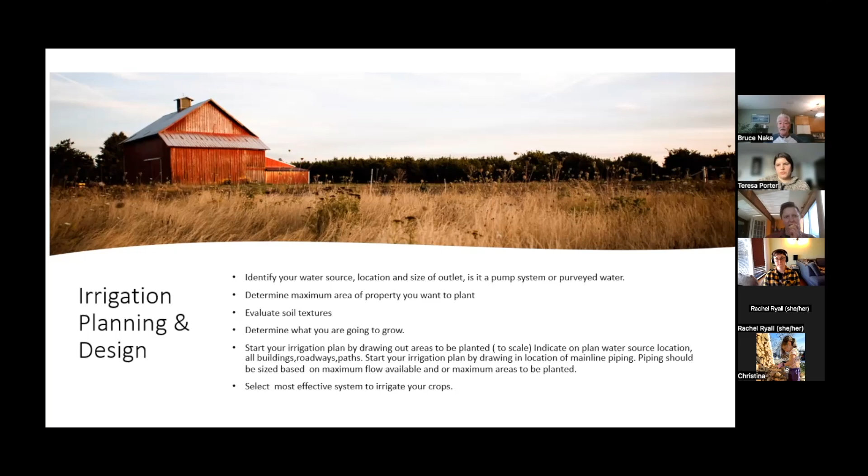Your main line is from your source of water. It is going to be the main carrier pipe, or is going to carry your water to your various areas that you have planted throughout, obviously. Okay, so we are going to look at your water capabilities, where your sources are from. So we have two sources of water capable.

We're going to be looking at water that is going to be pumped, or we're going to look at purveyed water. So if you're using a pumping system, it's important to know a little bit about the well. If you're new to a piece of property, you can usually get something called a well log. A well log is something that a well driller or a pump installer has produced. It's going to tell where your pump is, how deep it is down, and potentially what the power is available and how much water is available. That's a very handy tool to have.

Failing that, because there are some older wells out there that may not have that, you need to do some research. You need to look at what is in there for a pump. What is the total dynamic head of that pump? So what the total dynamic head is, how hard does that pump have to work to bring that pressure for your sprinklers to work? We need to know these sort of things. You can usually get a pump curve or something like that. If you know the model of the pump, take it to your local distributor or look it up online. You can usually find curves for these pumps.

So you have some sort of indication of how much water you have available, because a lot of people think, well, I got a pump, I got a well, here I go. But you have to put it all together. Because you have water, do you have enough to facilitate irrigating the entire area? Or maybe you'll have to step it down if you have a lack of water or too small a pump. So these things will have to fit together before you follow.

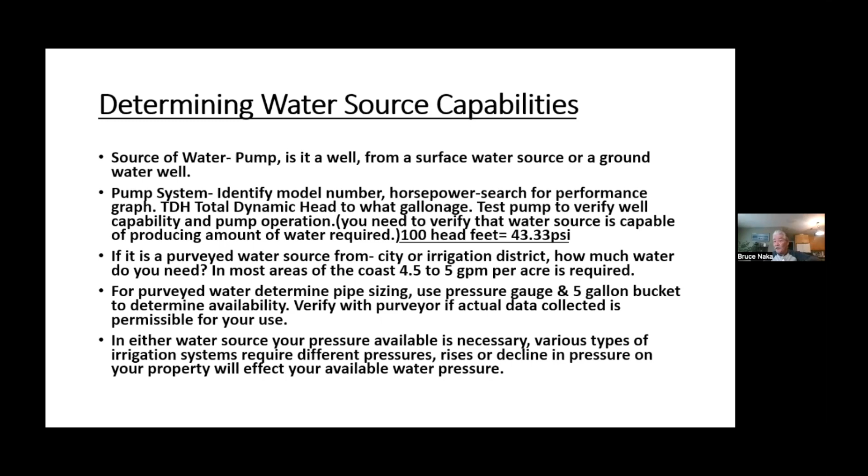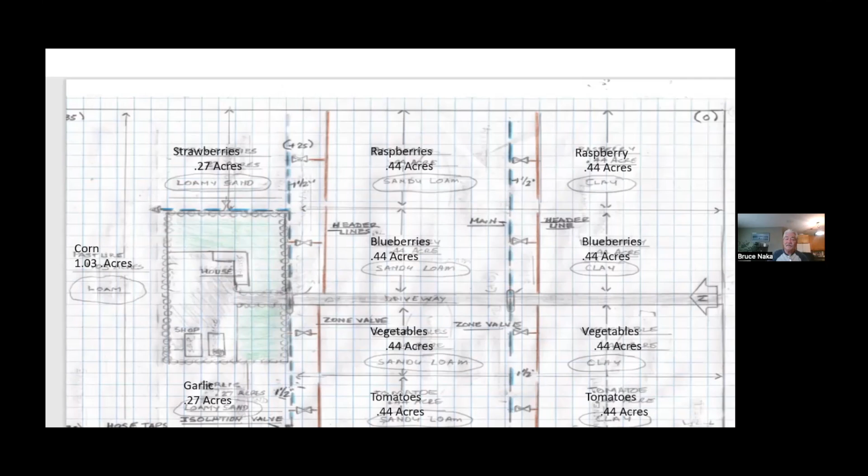Okay, soils. I won't spend a lot of time on soils. I am going to suggest something to you. As far as testing of soil textures, it can be very easy, but I think there's a simplified guide out. I was involved with another fella on a project in the Okanagan, which we just completed. Part of it was we had to develop some case studies as well as some fact sheets. My cohort on this did an exceptional job of creating some fact sheets.

He goes right through in detail how he would suggest you test your soil textures. So I emphasize that's a good way to go about it. All the way from getting the large rocks out to moistening the soil, rolling it in your hand, trying to get it into a ribbon. If it won't make into anything, it's going to be a sandy soil, and then it progresses down.

So I think that'll be available on the website. Probably you'll be able to get that from the CAI, Climate Action Initiative website, or you will be able to get it from IAF, the Investment Agriculture Foundation. So those would be 2 sites where you'll be able to get that.

On your soil triangle, you have groups: loamy sand, sandy loam, clay loam, and so on, all the way to your silts and your silt loams. If you can determine the textures of your different soils, you can determine the amount of water that your soil will hold, which is the important factor, because that's how you're going to determine how much water you have to give your plants. You want to determine if it's sandy soil, sandy loam soil, silt. There are a bunch of variables in between, but I wanted to minimize it.

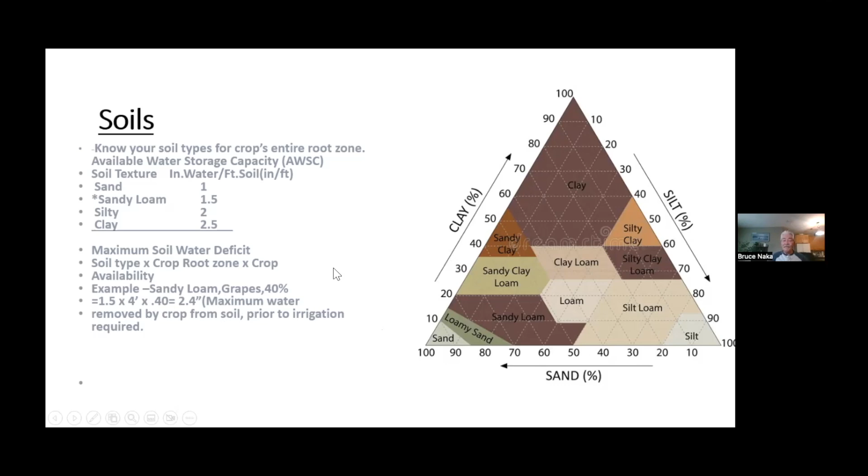I won't spend a lot of time on that right at the moment. It's just for the concept I'm going through. Okay, components of an irrigation system.

An irrigation system: what we want is an efficient irrigation system. That's one that's going to maximize available water for use on its crops, as expressed as a percentage. That's how you determine how efficient the system is.

Regardless of the type of irrigation system that you have installed, they have a lot of common items from your point of connection out to the field. There's a lot of the same items used regardless of the size of the system or the crops you're growing. There are some very common features of them. For example, where you start, you're always starting with either your pump or your connection to your water from your district or from your permitted water source.

The first item nowadays on most systems is a water meter. Water meter is the first item. It's usually followed by a backflow preventer. Anytime you have a cross connect where domestic water could also be supplied, you would need a backflow preventer. From there, you're going to be going out; somewhere along the line, a lot of people may want to introduce fertilizers to the system. And if you have drip irrigation and micro irrigation, that's the most efficient method of getting your fertilizers down into your crops.

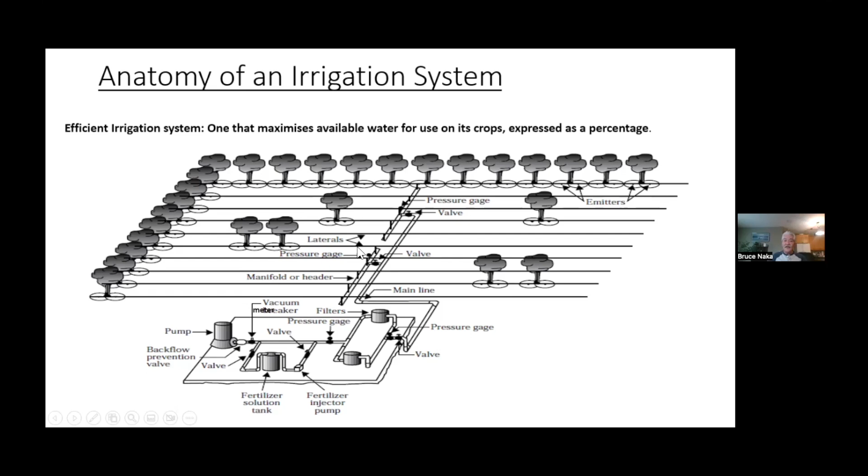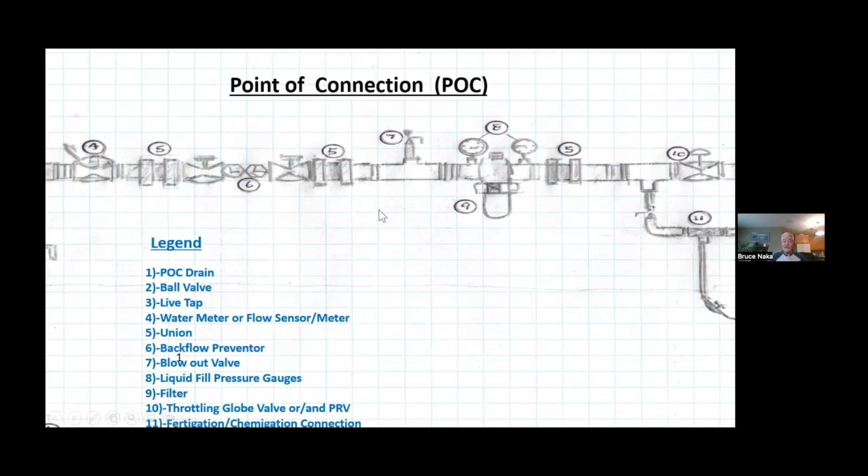Water meters. I showed where they go on the system. A lot of people see the water meter as something that irrigation districts put on as a great way to increase cash flow by charging you for your water. That maybe has some truth to it, but I think it's the only way that you're going to know how much water you're using, and if you are being efficient with your water use. A lot of irrigation districts in the Okanagan, for example, are giving agricultural customers an allocation, the amount of water you are allowed to use over the course of a season. If you exceed that, the threat is that eventually you will be charged accordingly. So the water meter can be a tool.

These little red dials on the side here, if one of them is continuously moving around, as you've probably seen on your house, with no water running in the house or out in the field, it means that you have a leak in your system. Good way to determine a leak. The flow meter can also be used: most of them nowadays are in cubic meters, but if you time how long it takes to get a cubic meter of water, it gives you your flow rate, which you could change to gallons per minute by calculating it out. So this can be a useful tool to detect leaks and to monitor how much water you're using.

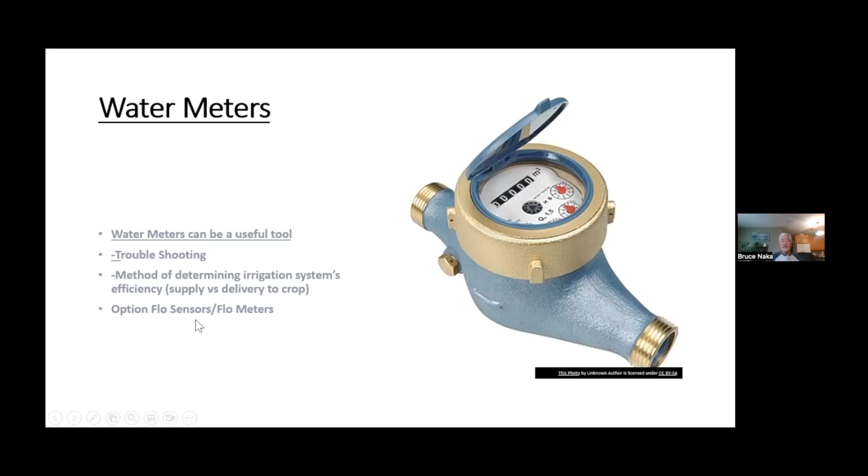Filters are really important in micro irrigation, drip irrigation, but even if you're using sprinklers, if you have very turbid water, it's a good idea to stop those contaminants out of the system versus going downstream and having them plugged. So there's a couple key things that are important. Remember, I was saying before that your point of connection would be the area that would be the minimum size. What I would suggest is you make all of the components in your main connection.

What I would advocate on a filter system is to have a filter system with enough surface area. Surface area is the area of a screen in this case here. This is a screen in this filter. So this screen surface area is the amount of filter area that you have available. So let's say you have a 1-inch outlet on your system, and you had a 1-inch filter, and that is what you use to filter your system.

What I would say to you is, depending on how coarse this screen is in your system, and that's going to be determined by what you're irrigating with. If it's with big sprinklers, not an issue. If it's with finer drip, the screen outlets would have to be a tenth of the size of the orifice that you have to minimize pluggage problems. So if you have a manual clean filter, a lot of times what I'll recommend, if you had a 1-inch service, for example, I would look at putting a larger filter, maybe a 1.5-inch filter, in that area with larger surface area, so it's not going to plug up as quick.

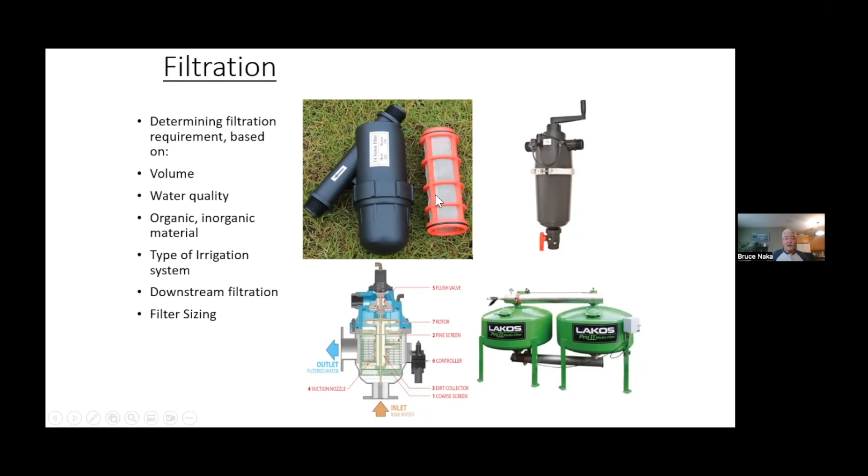Okay, on a main line, I'm not going to spend a lot of time on a main line other than to say that this has been caused by a vacuum. That's why that pipe has collapsed here. A vacuum, I was talking about air relief valves. I'm going from backwards to forwards here, but an air relief valve is one of the most crucial devices on the main line.

A short one for a small farm may not be as important, but keep in mind that if you have what's called a continuously acting air relief valve on the system, it's going to help your system operate that much more efficiently for a lot of different reasons. If you're filling the main line up with water, the air relief valve is going to evacuate all of the air out of the main line wherever it's located, so that it can more quickly fill that line up. If you're emptying a line, the air relief valve is going to allow air into the line, so it's going to help you to empty the line quicker.

Air relief valves generally are going to evacuate air out of a line if you have air in a main line, which usually will be located at high points on your main. So like on that first diagram I showed you of a field that had 35 feet in elevation change, at the very top of that field, you should have an air relief valve to evacuate that air, so it's not going to cause problems in your system.

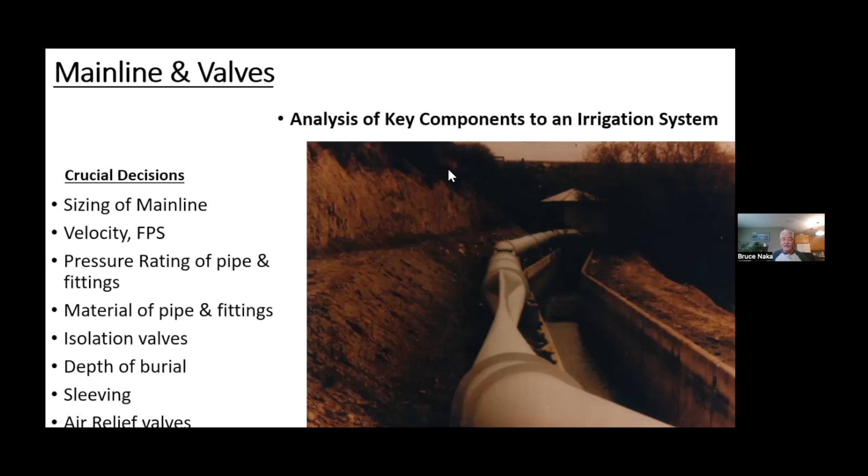Air relief valves we've already talked about. Okay, there is the air relief valves. The other thing I should mention about air relief valves on a system, as I said before, they should be at the high points of the system. If you have any control valve, like a pressure reducing valve or something like that, or a filter station, you should have an air relief valve there. And then if you have a long main line, like on a lot of our larger agricultural projects, every 1,000 feet along that main line, be it even flat ground, you should have an air relief valve.

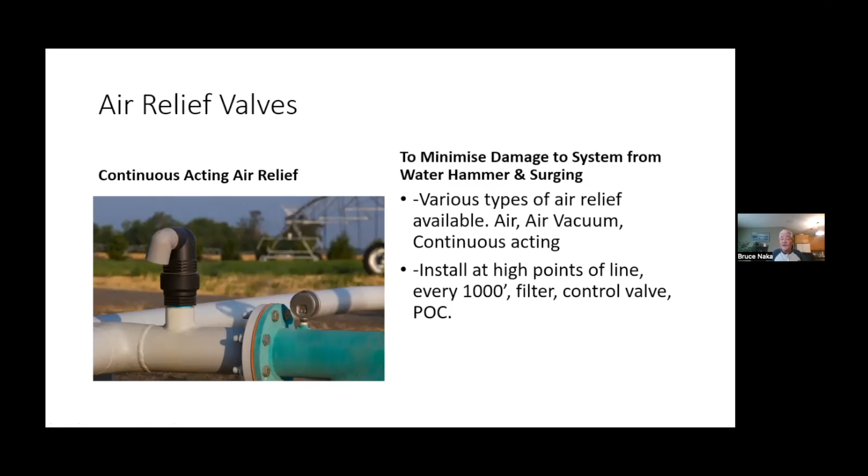This is a diagram I just needed to complete a workshop I was recently working on, but what I wanted to show on it for winter time, but I wanted to show if you're putting valves above ground, this I thought was a good method of doing it. So what we're looking at here is an electric valve here. The water is flowing up through here and going this way.

When you're coming up, the piping that a lot of agricultural projects that I'm involved in throughout the Okanagan, large vineyards, large orchards, large vegetable growing operations, they're putting the valves above ground for ease of service. They don't care about the aesthetics necessarily, where they want that valve to be in a valve box. One of the challenges any time you're putting the valves in a valve box is making sure it's large enough that you can properly service it.

A lot of times people may want to save some money. They'll put a valve box that's just barely large enough to cover this valve here. Well, if you go to repair that and you're up against the side of a valve box, boy, you end up digging up that valve box anyway. So above ground is a benefit. The material that's used above ground should be a minimum of Schedule 40 if you're using PVC pipe.

I always like to see an isolation valve ahead of an electric valve. Why? They don't break down all the time, but they are going to break down, and it's a nuisance if you have to drain a whole main line in order to fix one valve. If you can just isolate that valve there for a period of time and do your repair on your system, this is making life a lot easier.

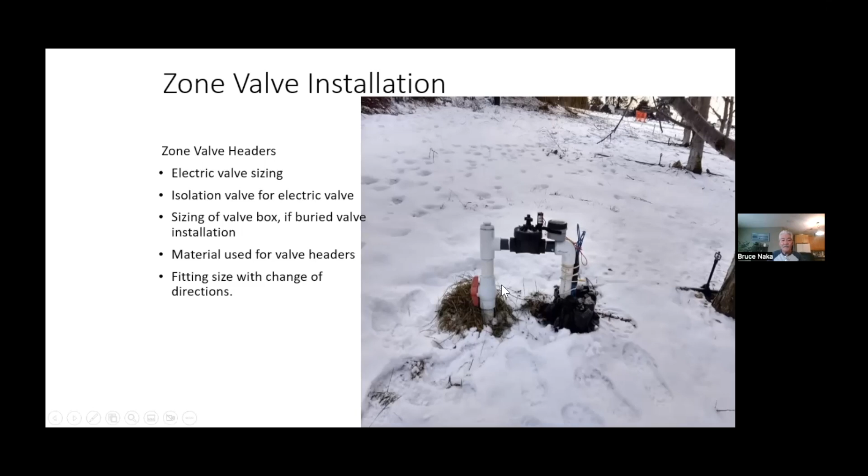Leaks. Don't have to spend a lot of time on leaks, but I always like to bring up leaks because if you're irrigating in agriculture, your irrigation system is operating 24/7. It's operating 24 hours a day, 7 days a week, and you have a leak. This is a leak from a traveling gun, or if you're just on a main connection like this. I go by so many orchards and I'll see a leak at the system, and the guy will say, well, it's just a little leak.

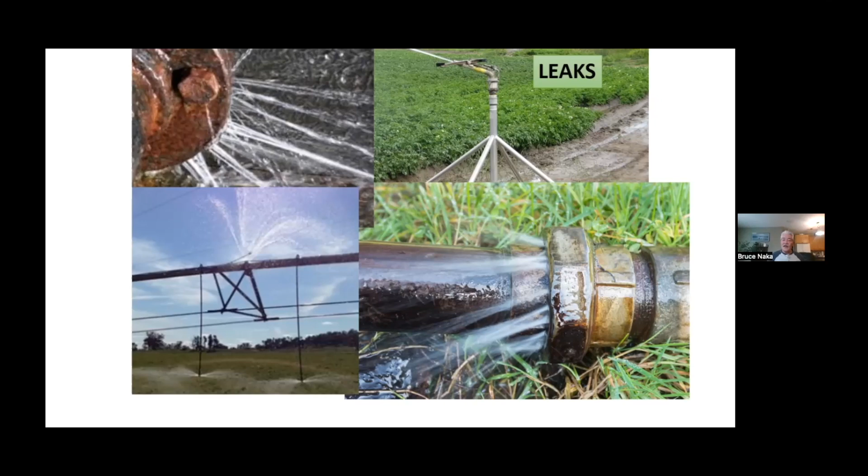Well, take a little leak. Let's say it's a little leak that's only giving you 5 gallons per minute of water. 5 gallons per minute of water, that's 300 gallons in an hour, over 24 hours. And if it's doing that the whole time throughout the season, you're wasting a good percentage of your water just through a leak. So any leak should be taken care of right away, and it sure impacts the efficiency of your system.

What is application efficiency? It's the percentage of actual water supplied by a system being delivered to the crop. The water that you have coming out of your point of connection: if you have 20 gallons per minute of water coming out of your connection, is that 20 gallons per minute being delivered to your crop, or is it being lost before it gets there?

Uniformity and efficiency, people get mixed up a lot. Irrigation uniformity is the estimated variation in water volume between sprinklers or orifice devices on a system. In other words, a uniform system is going to have equal amounts of water being distributed through each sprinkler or each emitter through a system. That's how you measure uniformity.

When we're looking at an irrigation system, be it a new system or whether you're planning to put in a system, we're going to look at all areas of the system. We're going to look at pressure at the beginning of the system. We're going to keep in mind the rise in elevation, how that's going to impact your pressure. We're going to calculate how much friction loss, which is the amount that's lost to friction as your water flows along your pipes through your main line and your laterals and even in the fittings. And then we will calculate that all out.

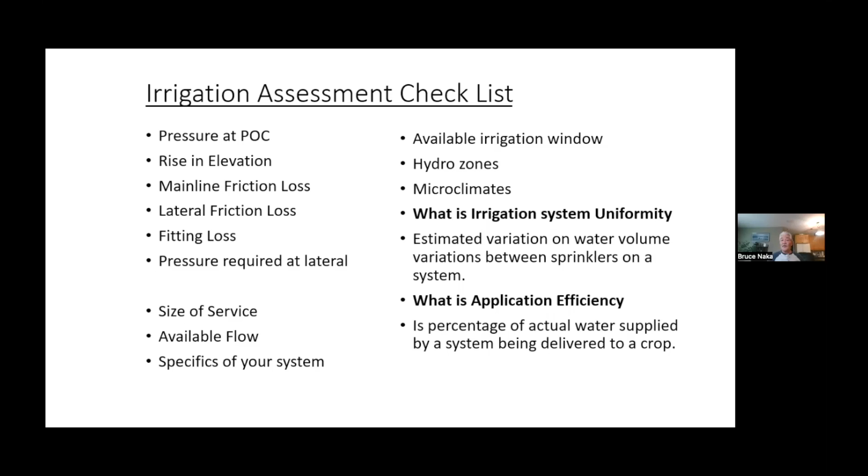I want you to keep track of this item right here, because every different irrigation system that I'm going to show you is going to have an application efficiency on it. The higher this number is, the more capable it is of delivering that water in a smooth manner to your crops. So the challenge with a wheel move system is the nozzles wear out on them. There's a lot of gaskets on them that wear out. The spacing and the uniformity of them all cause differences in the amount of water used from one end to the other.

So for most of what we're going to be seeing, it's not the system that we'll be using for most of our gardens and that we're looking at today, but it has an application efficiency of 72%.

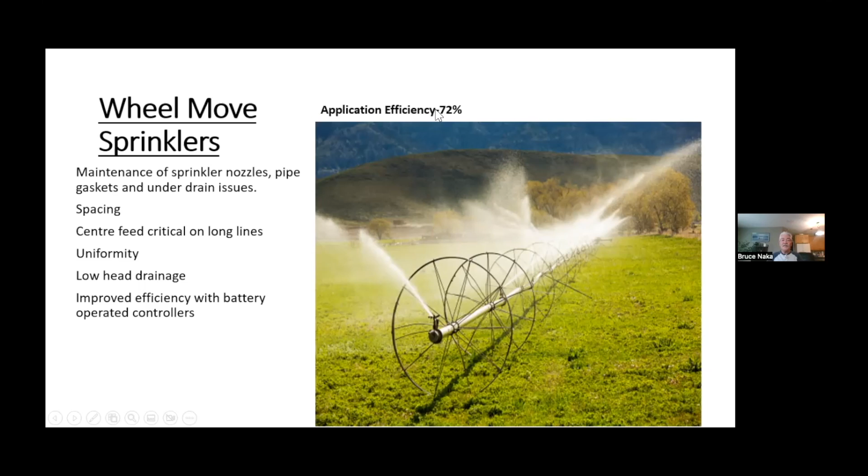The other area we're not going to spend a lot of time at all is traveling guns. And in saying that, you'll notice that on the initial drawing that I did, I showed 1.2 acres where they were going to be planting corn, and I showed that in a traveling gun. Well, not one nearly as large as this. You can get very small guns right now, putting out 20 to 25 gallons per minute of water, let's say, that you could irrigate the most effectively for corn areas.

So the main things in that case, again, you see how low this efficiency is. It's only 65% on a traveling gun versus the 72 on the wheel move even. But it may be the most effective, not efficient, but the most effective method of watering, say, corn or something like that. The size of the hose and the nozzles are the main things that wear out on guns.

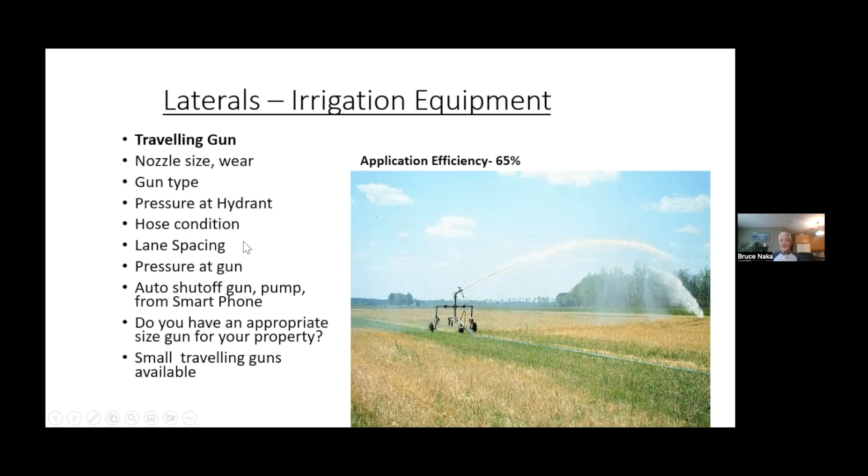This is getting more into the line of what we're working on. A lot of conventional systems, and it depends on the crop, may elect to go to sprinkler systems. Sprinkler systems, you can get them in overhead, which are usually up higher, so they're averaging around 70% efficient. Under tree, which are closer to the ground, say 12 inches off the ground, can be as high as 75% efficient, more efficient systems. So what makes these systems work the best is spacing has to be right.

How do you space sprinklers? What we usually recommend is to space your sprinklers at 60% of the diameter of the sprinkler head. So if you had a sprinkler head that has a diameter of 50 feet, then you would take 60% of that and you should be spacing those sprinklers at 30 feet apart.

The height of the riser, obviously, is affecting your efficiency. A lot of times people will have heads up 7, 8, 10 feet in the air to get over top of their crops. That's going to affect their efficiency. The pressure on the laterals, what are those laterals doing? Are they going down steep hills? Are they going up hills? Or do you have issues like that? You want to look at differences in the pressure from these different sprinkler heads, how that's affected.

Low head drainage, when that just shuts off, is all that water going to drain down to the bottom and cause puddling there? Uniformity, is our uniformity any good if our pressures differ that much along the line? Something as simple as heads being level. A lot of times heads get bumped, get bent, or whatever, and so they're not shooting off on the trajectory angle that's straight up. So that's something that's got to be looked at.

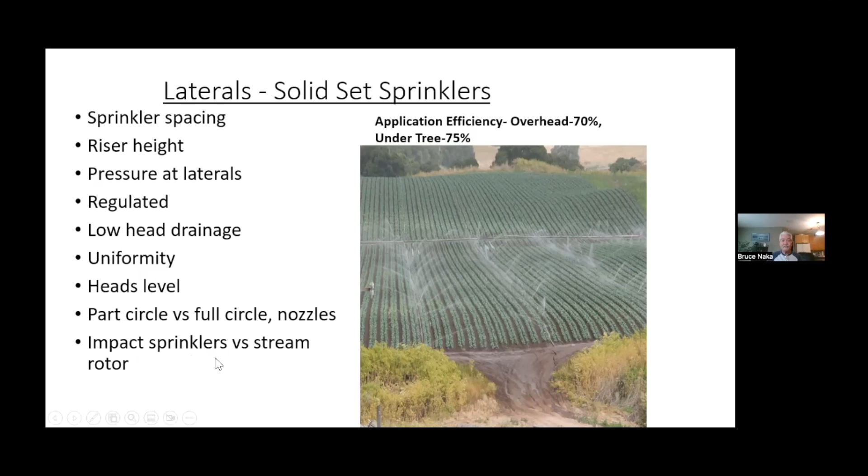So what's the answer to that? Modern day sprinklers, and I'm not advocating this particular manufacturer, but this is a good quality sprinkler. It's called a rotator. They're using these in lieu of a lot of the brass impact sprinklers. These are being made now as the replacement for them.

Why are they better? They design them such that they fight wind better, because on some of these, the water coming out of this nozzle hits a baffle and breaks it up on different parts of the circle, so it's hitting the in close areas better. The uniformity of the sprinkler head is superior over that of its brass predecessors. So there are a lot of advantages.

You can buy, for these sprinkler heads, pressure regulators that go on the base of the sprinkler head. So if you're going down a steep hill, you're going to have the same pressure at the first sprinkler as you would at the last sprinkler because of the pressure regulation in here. You can also have check valves built into these sprinkler heads, and if the check valve is in there, it's going to eliminate that low head drainage at the low end of the system.

These plastic heads are far more robust than the predecessors, and why I say that is a lot of people are still using a lot of hand move aluminum piping out in the field. And if you or a student are dragging your pipes along and bumping them on the ground, a plastic head with moving parts like an impact sprinkler is going to break. These are robust. Your nozzle and moving parts are guarded, so it's not going to break down. So, yeah, sprinklers have come a long way, and there are some excellent manufacturers out there.

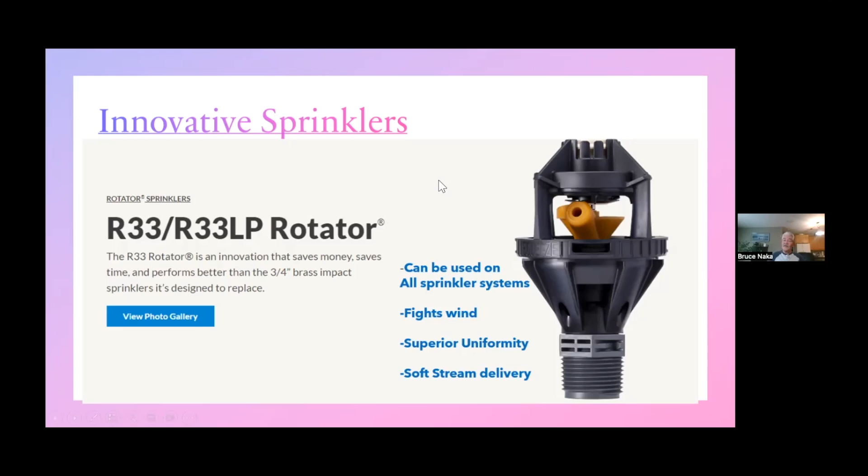Micro sprinklers, as you can see on here. What is a micro sprinkler? A micro sprinkler is a sprinkler that's using a significantly lower flow of water than that of a sprinkler head itself. The benefit of that is a lot of times if you are applying water too fast, your soil cannot accept it at the same rate as you're putting it down, and it's going to cause puddling. Micro sprinklers are always lower volume of throw, and they are used a lot right now in orchard crops, vineyard crops, and the likes of that.

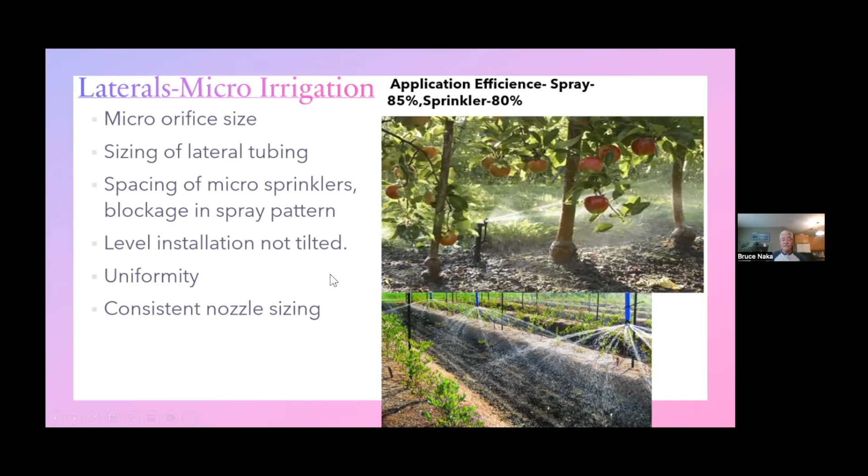Drip irrigation system. As you can see, a drip irrigation system is 90% efficient. It's probably, from that perspective, the best system on the marketplace.

Drip is putting water down at a very slow rate. It's efficient because where is it applying the water? In this case here, just look at one of these pipes for now, please. Most of the drip irrigation we're using nowadays isn't the punch-in style where you're actually pushing an emitter wherever you so desire it.

With this type of a system, we are consistently purchasing a tubing that has emitters pre-installed at varying measurements. So in an orchard or something like that, we may have an emitter installed inside of the line every 2 feet along the line. If we're dealing with vegetables or something like that, emitters might be 12 inches and 6 inches apart. The water is being consistently applied slowly right to the root zone of the tree, increasing the efficiency of it. And most of these nowadays are pressure compensating.

The downside of all of this goodness is the emitter orifice size, even smaller yet. So you've got to be cognizant of the filters you're using, and also make sure that your filters are large enough so you're not having to clean them every couple times a day. So that's the big nemesis. You're going to need that fine filtration, and for drip irrigation, just make sure you have a large enough filter to facilitate that, or go to an auto flushing filter.

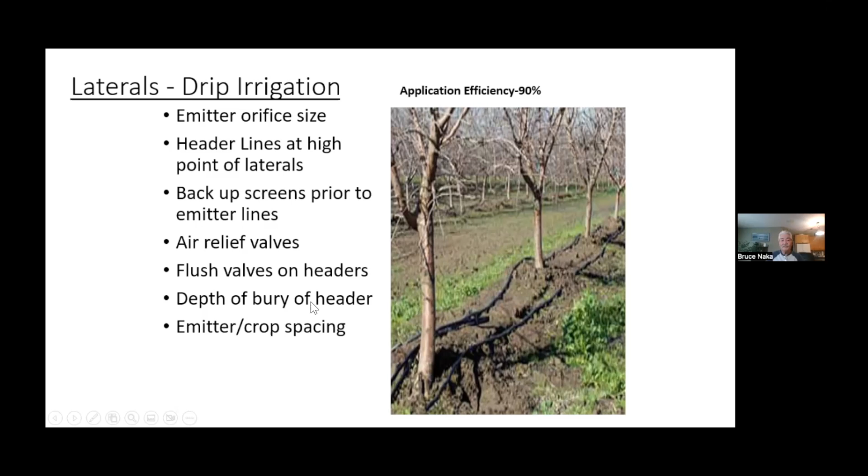Hey, Bruce, sorry to interrupt. Yes. I just wanted to give you a time check. We've got about 20 minutes left, so just keep that in mind in case you want to do the question and answer section. Yeah, this section here, I'll go very quickly. I'll be finished this in 5 minutes. Awesome.

Okay, so subsurface drip irrigation system. The most efficient system of all is the subsurface drip irrigation. Well, that's the same system, except you're burying it down in the ground. Great, you go from 90 to 95% efficient, but then you have big problems with not seeing what the system is doing, so you don't know if it's actually working, as well as a lot of rodents that are going to affect you. So there's a lot of different methods out there to control that.

Some companies are utilizing what's called a copper oxide. The little copper wire is installed at the time the emitter is being put in, and the copper deters roots from growing into the outlets of the drip emitters. You can get some with check valves and the likes of that. That is always the downside of going to a subsurface drip system.

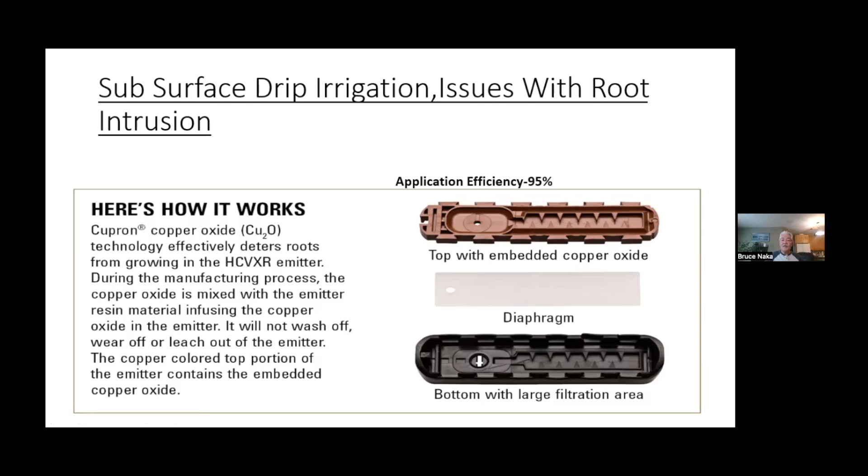They're being used a lot more right now, even on crop areas where they were using traveling guns down in the States, cotton and different crops like that. They are using drip irrigation in some circumstances where there's a water shortage or pressure shortage. So this is an idea of what the system will look like.

The machine will pull all these lines in 24 inches apart, 18 inches apart, depending on the crop, and at a depth below the active working areas. So if you're prodding into the ground, it would have to be a foot at least down in the ground. But it's something that some people are doing right now.

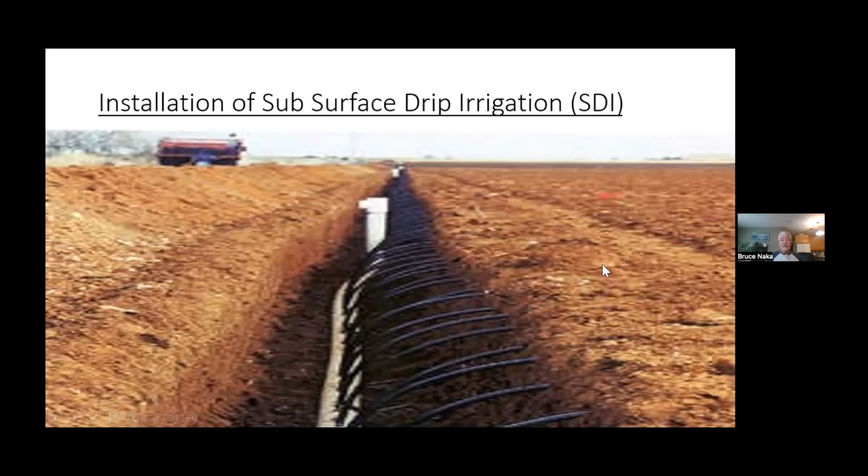So selecting the best system for your crop, filtration is important. Water treatment may be important. You want to look at the volume of water you have available, pressure you have available. If it's too low, you may want to look at a drip irrigation. We haven't got a lot into crops right now, but different crops require the replacement of more water than others. Crops that you are planting, make sure you have enough water available for that.

Retrofitting into a system, you have to be careful what you're doing, making sure everything is of the right size to do that. Soils may make a variance on what you decide to do. If you have a real heavy clay soil that's not going to accept the water too fast, that may make you want to go to a micro or a drip type. Length of your rows, like in vineyards, or elevation changes, they're quite dramatic, so you've got to keep that in mind when you're selecting a system.

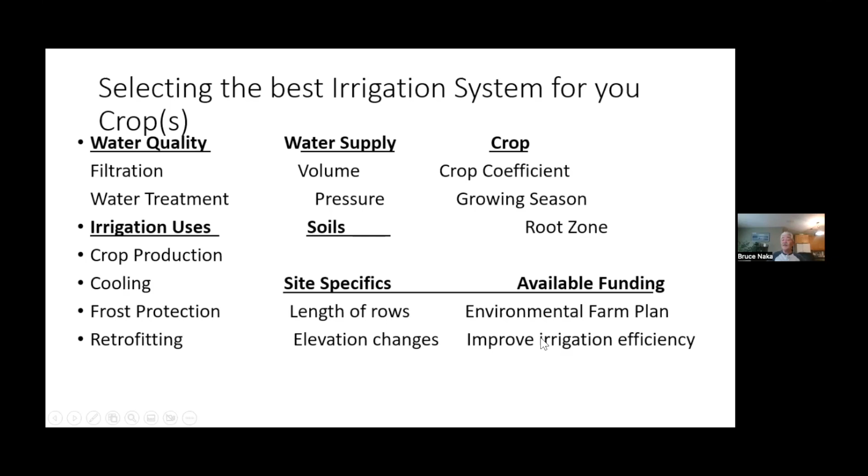And there's available funding for a lot of things from the environmental farm plan or anything to improve irrigation efficiencies. That's something we could talk about too.

Different tools that are useful for irrigation purposes. Weather stations are great, but they're expensive. There's Farm West out there. It's a service that's available. Get your daily evapotranspiration rates. That will help you to schedule your irrigation system. This isn't the time to talk about it a lot, but you might want to visit farmwest.com. It's a useful site.

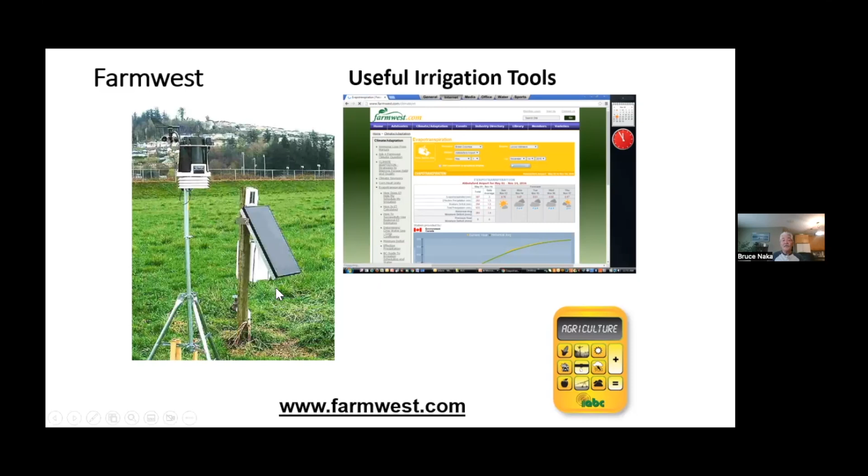Smart irrigation controllers. There's something that I was talking about earlier, like the ability with the flow sensors to be able to shut this off. That's a smart irrigation controller. You can get ones with Wi-Fi capabilities, so you can run them off of your tablet or your phone. Also good. Two-wire systems are really a good idea. Two-wire system, instead of having to have a separate wire to every individual zone, you have a two-wire system. You can run up to 100 zones off of 2 wires on a system. So a lot of larger projects are going that way.

Here's a little device that you can use. So it's like a mini weather station. It's a solar sync made by one company. So it's got something that's mimicking evapotranspiration. It's collecting how much water catchment you have in an area there, and it's modifying your runtime. So if you had your drip irrigation set to water for an hour a day, this sensor may pick it up, and if you've had enough rain in the last little while, it may reduce it to half an hour or something like that.

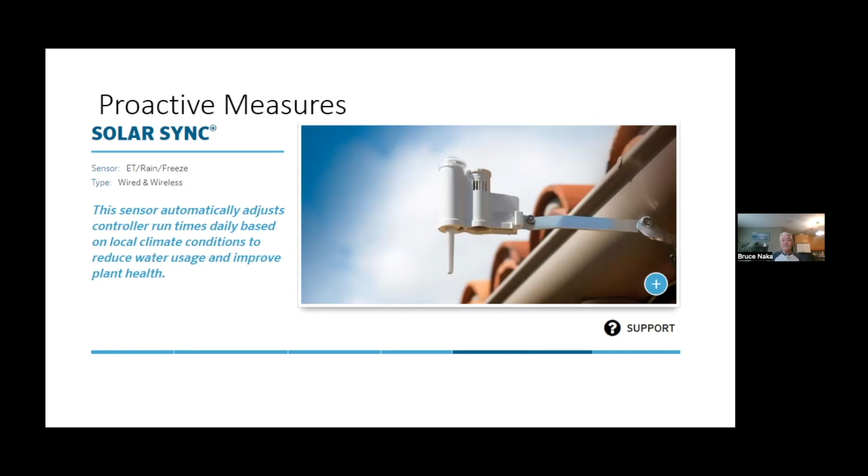You can also get those for soil sync, which is actually the moisture sensor, soil sensor, like a Watermark sensor that goes in the ground, gives you a reading. You can use that, which is probably one of your best ways of gauging water.

This is the flow sync, or the flow sensor I was talking about. It just goes into a T in your line, and with these wires, it can hook to a controller and give you what your flow of every individual zone is. This is a little paddle wheel. It turns around. The RPM that it turns, that correlates to a flow.

Proactive measures to minimize drought impacts. Depending on your crop, if you have a deep root zone, then you can get water early. Start watering earlier. Fill up your root zone so that all you're doing is topping it off with your irrigation system when you get into a drought condition. Soil moisture sensors should be evaluated and put into different grounds. It's an excellent way of staying on top of things, knowing what's going on down in the ground.

Soil amendments are always going to help for holding that moisture in your ground at the end of the season. Mulching and cover crops. And like I was talking about a little earlier, if you don't have the water available, instead of planting that whole 5 acres, maybe reduce it by 1 acre so you can properly irrigate the area that you want to grow your crops on. Lower volume with higher yield could give you the same end result.